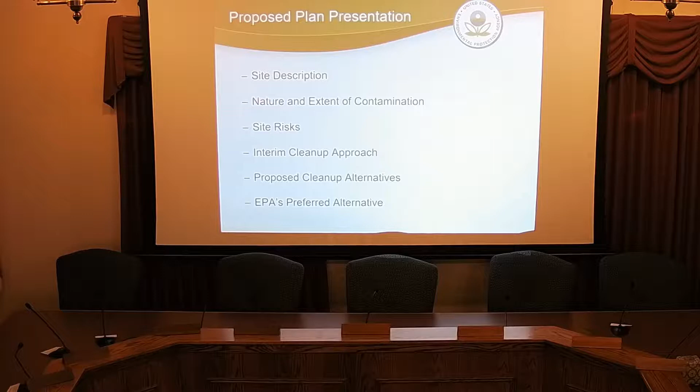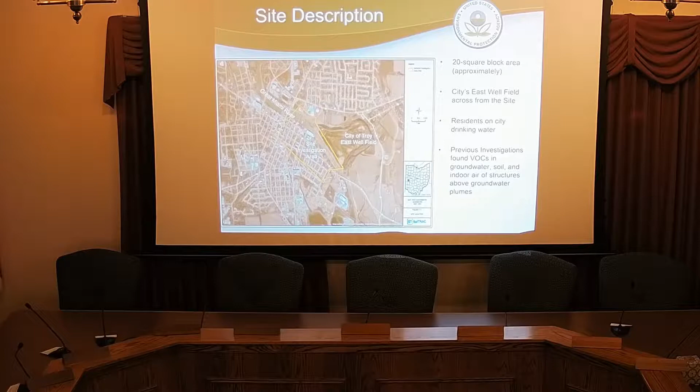Okay. Do you want to shut this light a little so you can see? Yeah, I'll do that. That's it. That's it? Okay. Thank you very much.

The site that we investigated through soil and groundwater sampling is shown in this, whoa, hold on a second, is shown in this yellow boxed area. It's about a 20 square block area, and that's the site that we investigated, East Troy. Across the river here is the City of Troy's East well field, where they have 5 production wells that serve water to everybody in the City of Troy limits.

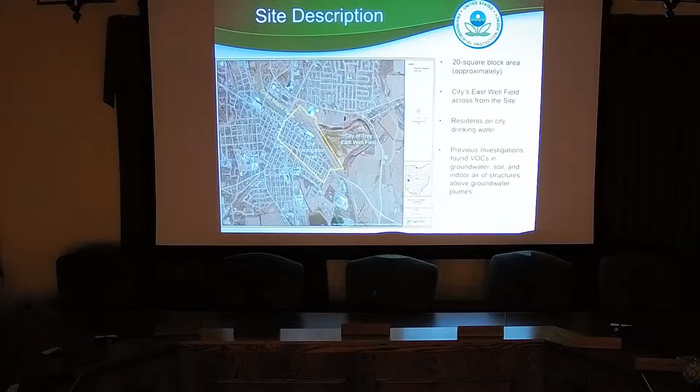Previous investigations that were done on the site by the state and us too found volatile organic compounds, and VOCs for short are those compounds that readily evaporate into the air. So we found VOCs in groundwater, soil, and also in the indoor air of some homes in the area. The site consists of 2 groundwater plumes. This is a residential plume, and it's mainly in the residential area between Walnut and Floral Streets.

This plume contains mainly perchloroethylene, or PCE for short, and that's usually what dry cleaners use as a solvent to clean clothes. And the source of this groundwater plume was a former dry cleaner, the Troy 1 Hour Martinizing cleaners that operated along Walnut Street, just off of Main. What we think is they were discharging PCE contaminated wastewater into their drains or into the sanitary sewer, and then over time there were some cracks in the sewer, which released PCE into the groundwater. Sorry about this.

The second groundwater plume is the East Water Street plume here, and it's located mainly along East Water Street. This plume is mainly trichloroethylene, or TCE, and the source of this groundwater plume was a former Hobart Cabinet Company facility. They used perchloroethylene and trichloroethylene to degrease metal parts, and our groundwater and soil data indicate that there must have been some direct dumping or spills on the ground, and the contaminants made their way to the groundwater, and that's where we got the East Water Street plume.

The site was first discovered back in 1988 when cis-1,2-dichloroethylene was discovered in a couple of the production wells. They were very low levels, well below the Safe Drinking Water Act MCL. The MCL is 70. But that prompted investigation by the state of Ohio. And in 2006, Ohio's sub-slab vapor sampling underneath people's homes and buildings confirmed that these VOCs, or volatile organic compounds, are moving up and getting into the indoor air.

So they called us, a different program, our removal program, and our removal folks came out here and did a site assessment where they collected abundant soil and groundwater, they collected sub-slab vapor samples, and they also sampled the indoor air inside people's homes. And as a result of that sampling, 16 homes and 1 school, St. Patrick's School, received sub-slab depressurization systems, which are similar to a radon mitigation system.

In 2008, the site was listed on the National Priorities List, so it became a Superfund site, and because of that it also became eligible for federal funds to clean it up. In 2010, we started our investigation, collecting soil and groundwater samples. We did several phases and completed it in 2014, and in 2015, we finalized the remedial investigation report. That report gives the sampling data from all of the sampling that we did. It's in the Troy Public Library as well for you to view.

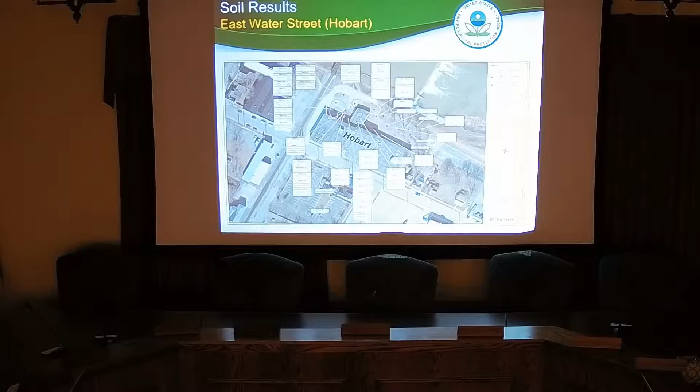Over at Spinnaker, we found some area that had some elevated results. There's one area in particular here. This is the western portion of their Spinnaker parking lot. It's just a narrow portion of it, but we found trichloroethylene at a concentration of 22,000 parts per billion.

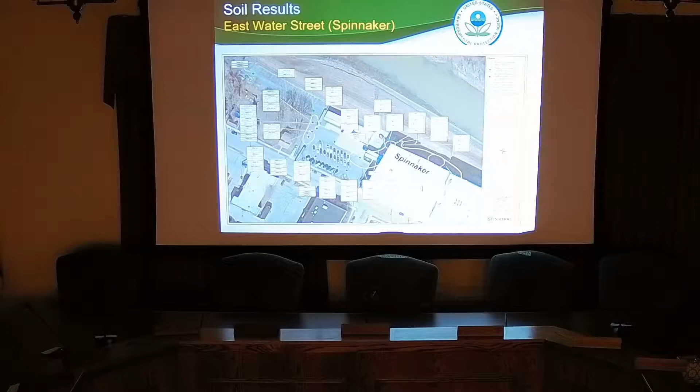Parts per billion. Okay, so a part per billion is like 1 ink drop in a large fuel tanker truck. So it's really small. Or you could say it's 1 second in 32 years. Very small, but still. The area between Hobart and Spinnaker, we did sample. We blocked it out to protect people's privacy, but we didn't find anything there. Everything was below our residential screening levels.

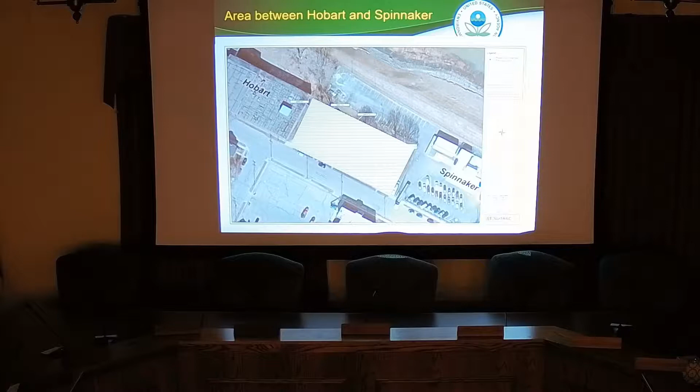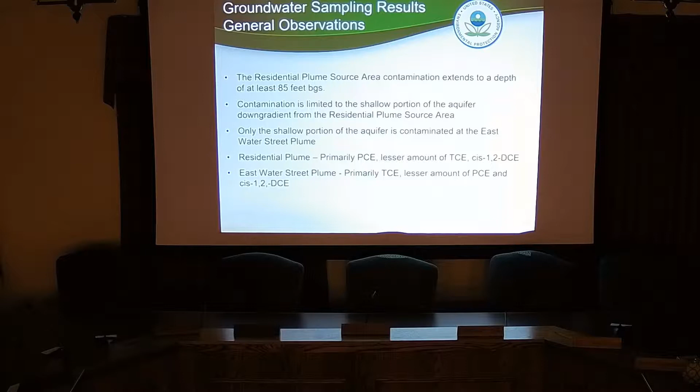Okay, so some of our general observations when we did the groundwater sampling: the residential area, where the dry cleaner was, we call the residential area plume source area. That's where the bulk of these PCE or perchloroethylene soils are located, and they're subsurface. But that's the area that we wanted to target. So we did find really high concentrations of PCE, perchloroethylene, in the subsurface. I'll go over the concentrations in a minute. But we did find as well lower levels of PCE at a depth of 85 feet below ground surface.

And then as you move down gradient, the dry cleaner is at Walnut and Main, and if you start moving down gradient toward Floral, the concentrations start to drop off, and you see the contamination primarily in the shallow part of the aquifer. And then at East Water Street, that plume, it's mainly the shallow portion of the aquifer that's contaminated.

The shallow portion of the aquifer is like between 20 and 40 feet. Then there's a middle portion between 40 and 60 feet, and then the deeper portion, which is 60 to 200 feet. And that's the portion that the city draws their drinking water from, which is clean.

Okay, the residential plume is primarily PCE with lesser amounts of TCE and cis-1,2-DCE. And the East Water Street plume is the opposite. So it has more TCE, trichloroethylene, than perchloroethylene.

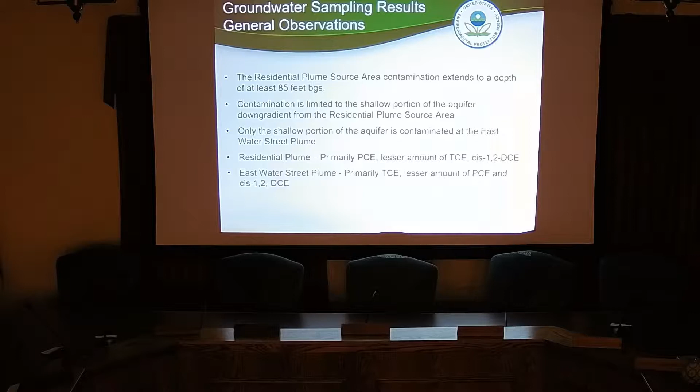It drops down to 800 parts per billion around Clay, and then from Clay to Union, it's generally between 800 parts per billion and 500 parts per billion. From Union to Counts, it goes from 500 down to 100 parts per billion. And then from Counts to Morehead, it really starts dropping off. It's under 100, but by the time you get to Floral, we don't find anything in the groundwater. And again, the MCL, the drinking water standard, is 5.

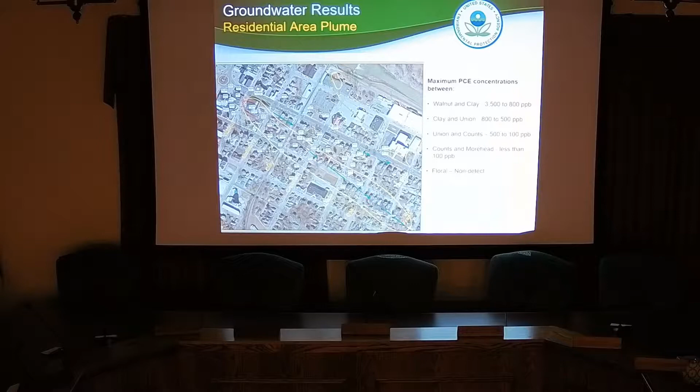Okay, so this is the dry cleaner. This is the area that we're going to target for cleanup. This is called the residential area, residential plume source area. The dry cleaner, I think, used to operate here at 10 East Main, but it appears that they have used the back parts of these two buildings, 8 South Walnut, 10 South Walnut. And again, they were discharging their processed wastewater with PCE into the sewers. And there was some breach, I guess, along the line here that ended up with the contamination here at depth.

But we're finding PCE at 34 feet at 2,700 parts per billion, at 39 feet at 2,400 parts per billion, and then the highest that we found was 3,500 parts per billion at 44-foot depth. So this area in red is really where the highest concentration of PCE is located. This area contains the bulk and the mass of the PCE, perchloroethylene, in the groundwater.

And it kind of acts like a sponge. As the groundwater moves through, it keeps releasing PCE into the groundwater over time. And without addressing the sponge area and cleaning that up, you'll still have PCE moving through the groundwater. So that's why we're going to address this area.

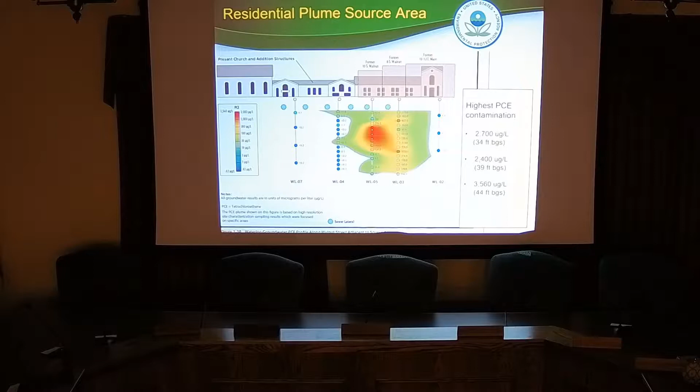Groundwater results around East Water Street plume. Around Hobart, we did some groundwater sampling. We found PCE and TCE in the groundwater, but it was under 20, still above the MCL of 5. We did some vapor intrusion sampling. We sampled homes. Hard to see, but we sampled homes in phase 1. We sampled them once. In phase 2, we sampled some additional homes.

All right, let me back up. Phase 1 is shown in the green areas. Phase 2 was the orange areas. And then the yellow houses are the ones we sampled twice during our phase 2 vapor intrusion sampling. So we sent out 100 letters to people, mainly targeting those areas that were over the highest concentration of the plume.

We sent out several times trying to get access to sample their homes. We had maybe 30 responses, but 25 homeowners let us sample in their homes. So we really didn't get a lot of turnout, but just one thing to note: when the removal people were here, they sent out 400 letters. So everybody in this whole area around the site and just outside the site has been notified once or has been asked by EPA if they'd like their homes tested.

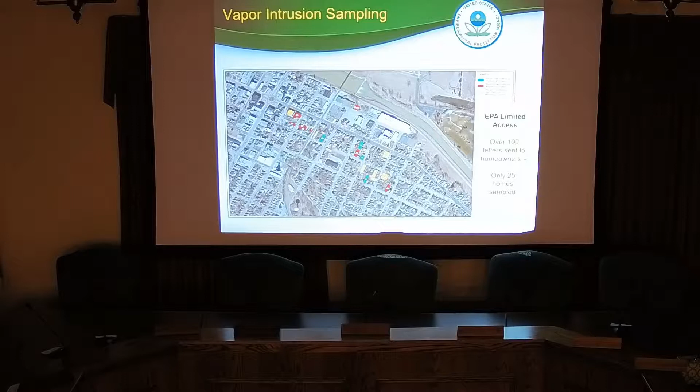Okay, site risks. I was talking about the screening levels. Anything that's above these screening levels, we pull into this method called the Human Health Risk Assessment. And the risk assessment tells you whether or not there's health risks associated with exposure to either contaminated soils or the groundwater. So I'll show you the risks now. Well, before I do that,

the soil along East Water Street, we had to divide up into exposure areas. We had 6 exposure areas, but EA1 right here is behind the Hobart loading dock, where the really high TCE and PCE soils are located. That's the area we're going to target under this cleanup. EA2 really didn't find anything as far as risk. Let me just pop you over to EA6. That's a narrow portion of the Spinnaker parking lot, and that's one of the other areas we're targeting for cleanup.

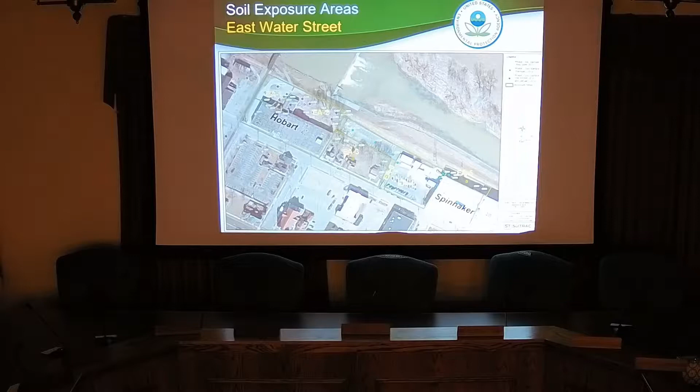But here is what the risk assessment said. For the EA1 soils, there is an unacceptable health risk if future residents or future industrial commercial workers were exposed to the EA1 soils. And the way they would be exposed to EA1 soils, because it's in the subsurface, is if that soil at depth is excavated and brought to the surface.

The TCE and PCE would volatilize. They would release from the soil, and the residents would breathe it in, or the commercial workers would breathe it in. And that's the way that they're being exposed. And if they are exposed that way, then that would be an unacceptable health risk.

Also to EA1 soils, the current and future construction workers. So if there was a construction worker who went into the EA1 area and dug a construction trench, the vapors that could be released from the contaminated soils, if they breathed it in, that would cause an unacceptable health risk as well.

EA6 soils, that's the portion that's at the Spinnaker parking lots. Future residents: the site is currently industrial, commercial, so nobody's living there, but as part of our risk assessment, we look at future reuses of the land as well. So if Spinnaker was converted into residential use and they were exposed to the EA6 soils, an unacceptable health risk would result.

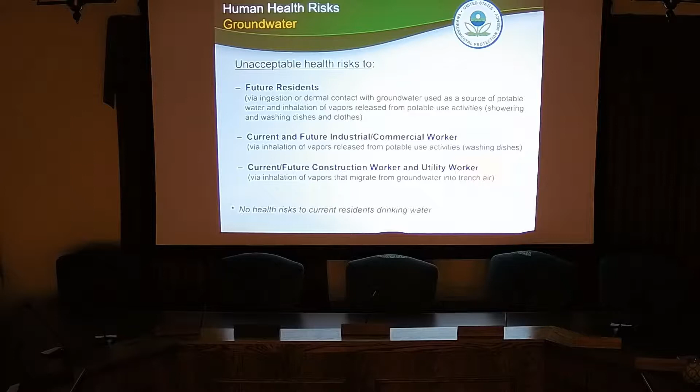Okay, so for vapor intrusion, we did pull in the results that we got from the people's homes. The risk assessment portion said that there's an unacceptable health risk to current and future residents living in the area due to vapor intrusion, okay? But I just want to point out that with vapor intrusion, you have the contaminated groundwater, and this water is evaporating, moving up through the soil, and it's getting into your houses only if there's cracks in the foundation. If there's no cracks in the foundation, you're not going to find it in the indoor air. But if there are, you could find it in the indoor air.

But the second part of that is that we did sample. We went out and sampled the people's homes and the indoor air. All of the concentrations we found in the homes that we sampled were all below a screening level. So there was nothing in the indoor air of the homes we sampled that presented a health risk. Yeah, thank you. But one thing I do want to point out is that even though we didn't find it in the indoor air, for people who live above these groundwater plumes, the vapor underneath their houses is very high, depending where you are. The closer to the dry cleaner you are,

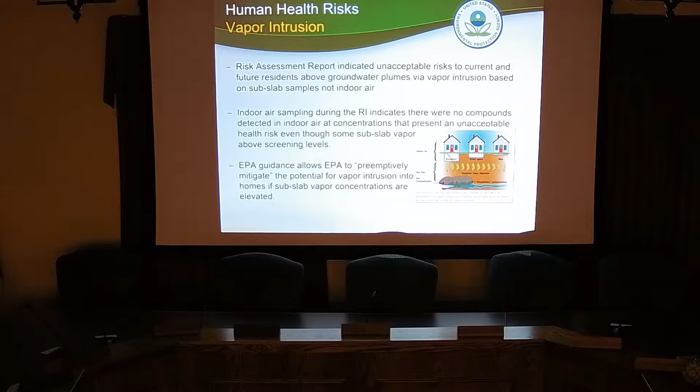Okay. So the subslab vapor samples that we collected show pretty high concentrations underneath your building foundation, but it's just not getting in the indoor air because there's no cracks or anything. So just pointing that out because before, EPA could only offer subslab depressurization systems, or these radon mitigation systems, if the indoor air presents an unacceptable health risk.

But now we have new guidance that allows us to what we call preemptively mitigate the potential for vapor intrusion occurring. So if you have high subslab and nothing in the indoor air, we can still offer you a subslab vapor depressurization system just because there is a potential, if a crack develops, that you could be exposed.

So our approach for the cleanup is to address those three areas, those sources of contamination to the groundwater, and that's EA1, right here, the Hobart loading dock area soils. We want to clean up the EA6 soils, and then that residential area plume, that source area that you saw, the red mass there. We want to clean that up too because those continue to act as sources of groundwater contamination.

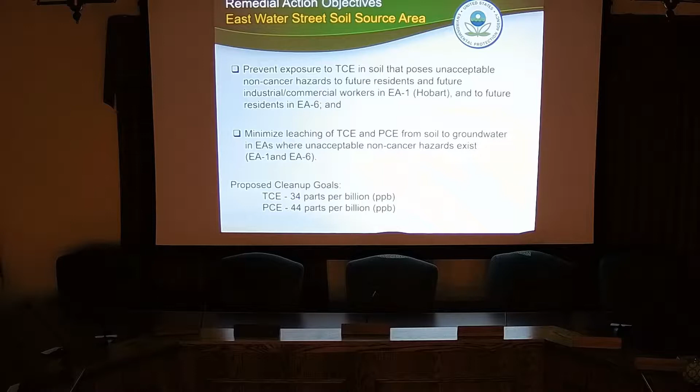We also want to minimize, since perchloroethylene and trichloroethylene, TCE and PCE, are in the soils, they can leach out into the groundwater. Sometimes there's periods of high rain, and the groundwater will move up, and it could be in contact with the contaminated soils, and then the PCE will release out into the groundwater. So we want to make sure that that doesn't happen. We want to minimize that.

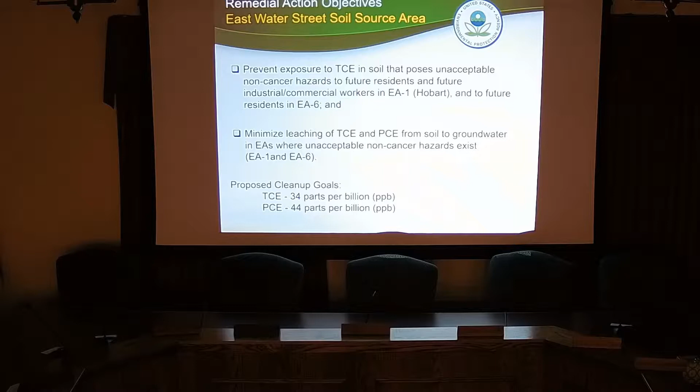And then our cleanup goals for the soil are the 34 parts per billion and the 44 parts per billion. And for the groundwater, our goal is not to reach MCLs. It's not to get to safe drinking water levels because the concentrations there are really, really high. So our goal is to knock down that mass of PCE that's out there by the dry cleaner.

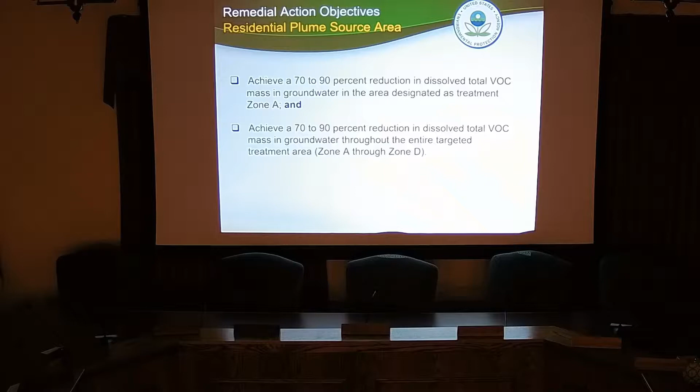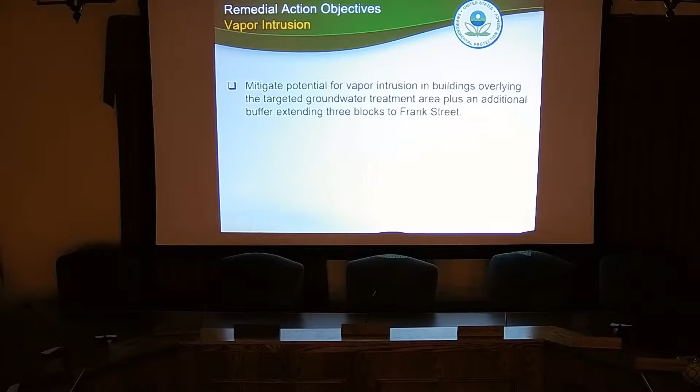We want to reduce the mass by 70 to 90%, not only in the dry cleaner, but we also want to achieve that same goal between Walnut and Union. In vapor intrusion, we want to mitigate the potential for any vapor intrusion to get into people's homes. Okay, so here are the cleanup alternatives that we evaluated.

Soil alternative number 1 is a no action, and we have to do that under Superfund law. The second one, soil alternative 2, is excavation with offsite disposal. So under that, about 9,100 cubic yards of contaminated soil would be removed from the Hobart loading dock area. At Spinnaker, I think it's 753 cubic yards would be removed from that area.

It'd be loaded onto a dump truck and then transported to a licensed landfill facility. The excavation area that's open would be backfilled with clean material. So that's that alternative, alternative 2, S2. Alternative S3 is a combination of both. It's excavation at EA1, the Hobart loading dock area, and capping the EA6 on Spinnaker property.

The EA6 soils that are contaminated are currently under an asphalt parking lot. But that asphalt parking lot is not constructed in accordance with Ohio EPA guidance for asphalt caps. So what we would do under this alternative is dig up 14 inches of contaminated soil and the 2 inches of asphalt that's currently there.

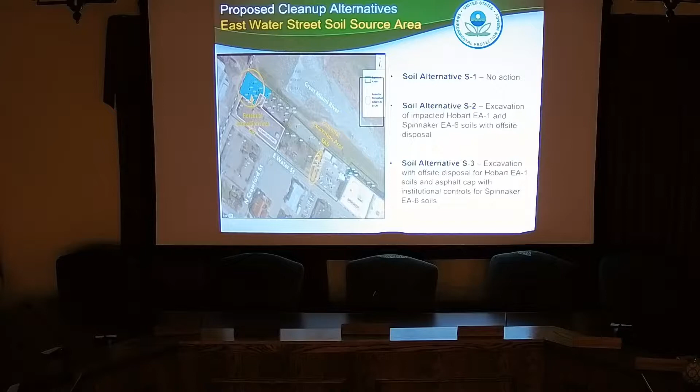We'd send it off-site, backfill with clean material, and then put 6 inches of asphalt. And that complies with the state of Ohio guidance, requirements for asphalt caps. So those are the 2 soil alternatives that we looked at.

Okay, so for groundwater in that residential plume source area, we evaluated no action, and then also we evaluated in situ groundwater treatment. We looked at ways to really aggressively treat the source area to knock down those concentrations, because eventually we want to get to MCL. We want to have clean groundwater for people. So the groundwater alternatives,

Oh no. Oh, sorry guys, what happened? Go back forward. Yeah, how do you get that out? Don't worry, just go back this way. We don't know how to do it either, so it's okay. Thank you. Not the only one. Okay. Oh, yeah. But how do you get it blown up? Oh, I know. I bet that's it, right? Of course. Okay, there you go.

Okay, so the 3 treatment technologies that we evaluated to address the source area, the first one it's called RGW2A. RGW just stands for residential groundwater. But 2A is in situ treatment. That means treatment in the ground with this process called enhanced reductive dechlorination. And what that does is it adds reductive agents to the groundwater underground, and that reacts with the PCE soils, and it breaks it down into less toxic forms.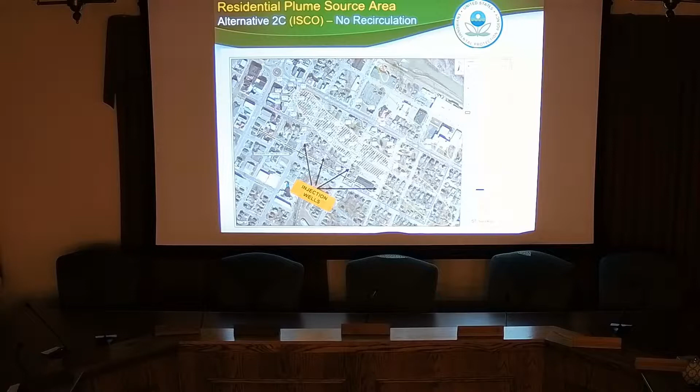After we get your comments, then we make a decision on what cleanup we're going to go with. And then from there, we have to sit down and do the engineering drawings, figure out how we're going to design this system. So that's what the next stage is.

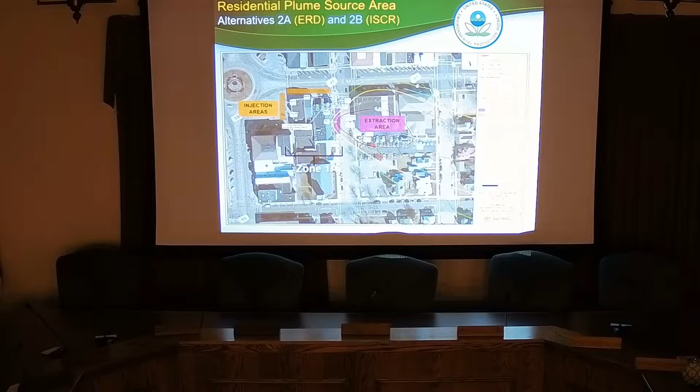That's what those two technologies do, whereas ISCO doesn't do that because it doesn't rely on recirculation. It's just taking clean groundwater, mixing the treatment amendments, and then injecting it into the ground. There's no extraction of groundwater or management of that Zone 1A water that we have to do.

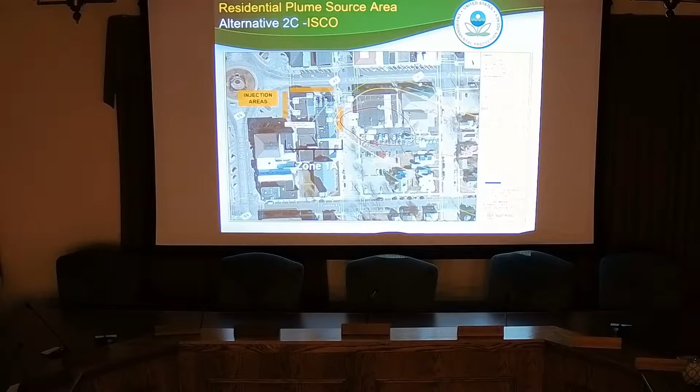Okay, good. The vapor intrusion alternatives, we looked at alternative 2, which was offering sub-slab depressurization systems to everybody who is in the treatment area. That's that area between Walnut and Union Streets. Plus, we want to add in an additional 3 blocks. So we're going to offer it to people between Walnut and Frank Streets and between East Water Street and Canal.

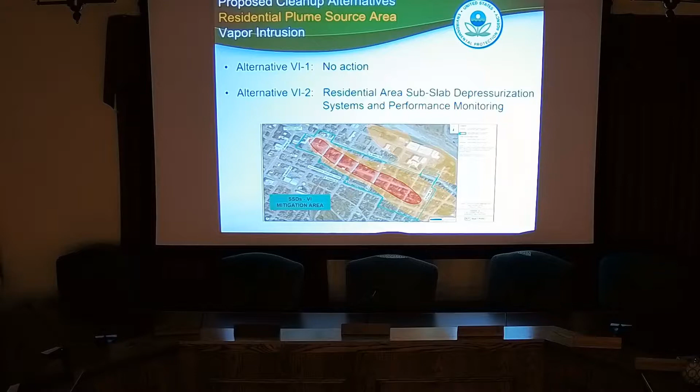It's Main Street, right? What? Main Street? No. No, I didn't say it. This is Walnut. This is Frank. This is Main Street and Canal. Sorry, thank you.

Okay. So now we came up with these alternatives to clean up the soil and groundwater. Now Superfund law makes us evaluate these alternatives against 9 criteria. And these are the criteria. The first 2 are threshold criteria. That's overall protection of public health. The second one is compliance with ARARs. That means compliance with state, local, and other federal laws. So any remedy that we select has to meet those 2 criteria. So all of those alternatives that we showed you meet those criteria.

Just popping down here, the modifying criteria. Our remedy that we select also has to have state acceptance, and the state did say they concur with what we're recommending, which you'll see later. And then we also need community acceptance as well. And that's why we're here at this meeting, to get public comments on our proposed cleanup.

So we take your comments into consideration, because whatever we're proposing here may change based on your comments. So that's why you are an important part of this whole process.

Then these 5 criteria in the middle are the primary balancing criteria. That's where you make these trade-offs to see which one is the best option as far as remedy. Long-term permanence and effectiveness is really how well the remedy holds up in the long term. Reduction of toxicity, mobility through treatment just means: does your remedy contain treatment? Does it reduce the volume, the toxicity, or mobility of the contaminants?

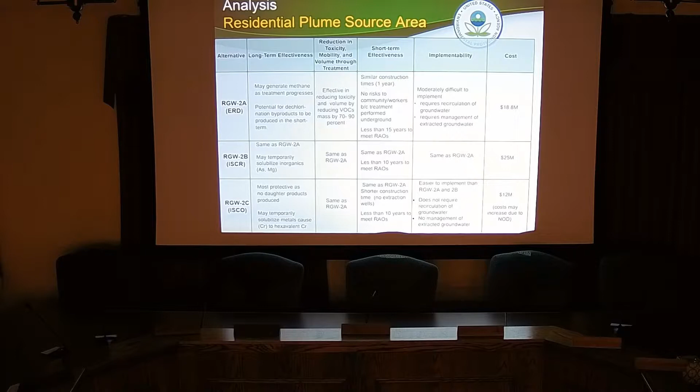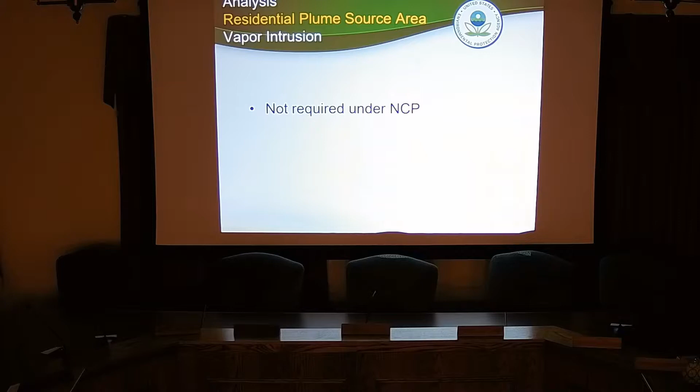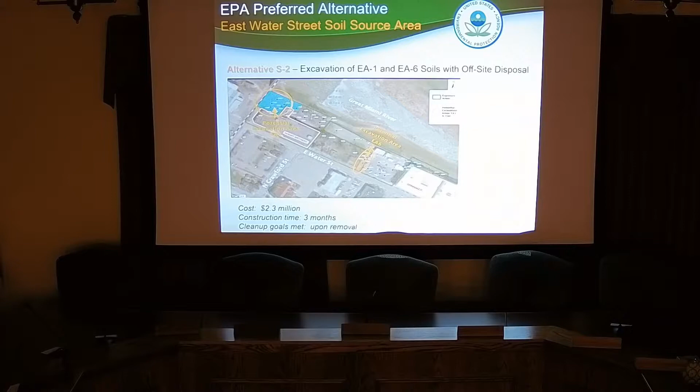Okay, and then I didn't go through the criteria analysis for the vapor intrusion because we're not required to under Superfund law because we're just considering one treatment. Okay, this is almost the end. Preferred alternative. This is what we're recommending, and we want to get your comments on. For the East Water Street soils, we're recommending alternative S-2 to excavate it, send it off-site, and backfill with clean material. The cost of that would be $2.3 million. The construction time from beginning to end would be 3 months. And then we'll meet the cleanup goals once we do the post-excavation sampling to make sure they meet the cleanup goals.

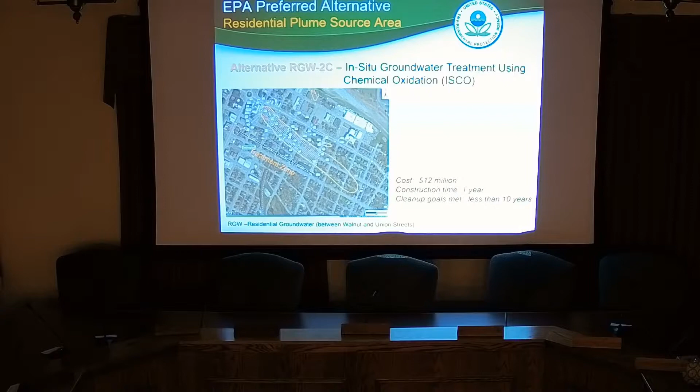For groundwater, we're recommending alternative 2C, which is the ISCO, primarily because you don't have the recirculation. It's just injection in the ground. You don't have to manage the contaminated water from that zone 1A. So it's just less complicated, and it's equally as effective. The cost for that is $12 million. It'll take about a year to construct, and as I said, for the cleanup goals, less than 10 years.

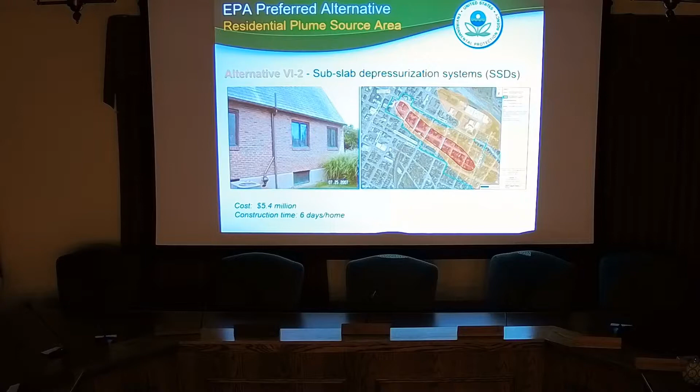Vapor intrusion, we'd like to offer people between Walnut and Frank and Main and Canal a subslab depressurization system. And again, that's to minimize or eliminate the potential for any vapor intrusion occurring. And especially because there's going to be a treatment area with homes above it. And so we just want to make sure that nothing is getting into the homes, especially since we're treating underground. So that was one of the main reasons there. And this just summarizes everything I just said as far as cleanup alternatives. And total cost of this entire remedy would be $20 million. Yeah.

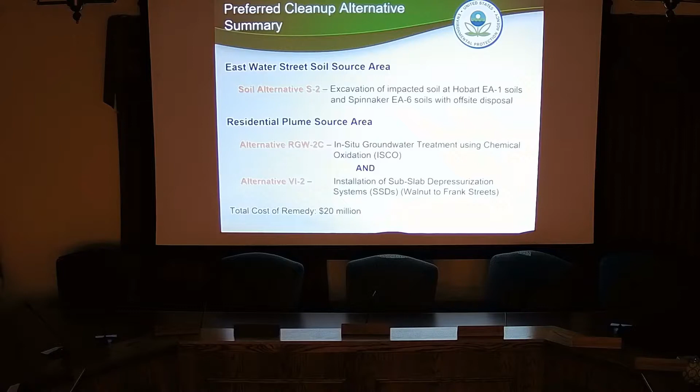And the next steps, as Adrian said, the public comment period opened the 25th of June, and it ends the 25th of July. Once we get all your comments, I'll take them back to the office, review all of them, and then I'll respond to them in writing. Then, based on the public comments, we consult with the state, select a final cleanup remedy for the site, and document that remedy decision in a document called the Record of Decision, the ROD. The ROD's not available yet. It will be available after we do this process here.

But there's a lot of documents in the local repository, your Troy Public Library, the RI, the FS, and all the other documents that we used to make a decision to where we are right now. So all of that is available for you. It's also available on the website, the EPA East Troy website, so if you go there, you'll be able to find those documents.